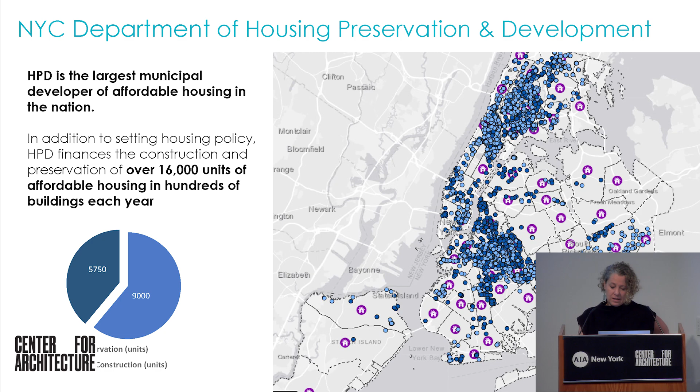Same goes for work in our preservation portfolio, right? Everything from solar, to deep energy retrofits, and finally even one passive house retrofit project that we've done to date. So this is important. It's really important to our mission of producing high quality housing across the 5 boroughs.

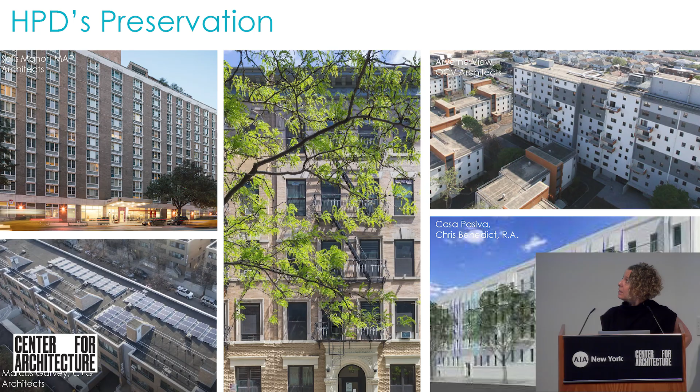We've been doing a lot of things since the Enterprise Green and LEED requirement rolled in — just a few that I won't focus on today, but for background, we launched our Solar Where Feasible program in 2020, which requires solar on all projects we finance where it makes financial sense. In 2022, we launched our $24 million joint retrofit electrification pilot with NYSERDA, and we're trying to electrify really challenging preservation buildings in our HPD pipeline.

What's interesting from a resiliency standpoint is we're focusing not just on buildings on oil, but buildings in flood zones where there's repeated flooding of equipment — that's the resiliency tie-in there. In 2023, we launched our Future Housing Initiative to fund all-electric passive house projects in our new construction pipeline. There might be some folks in that program here today, but I won't go into that. And in 2024, stay tuned — Earth Day's coming, and we always have something fun and new to announce at that point.

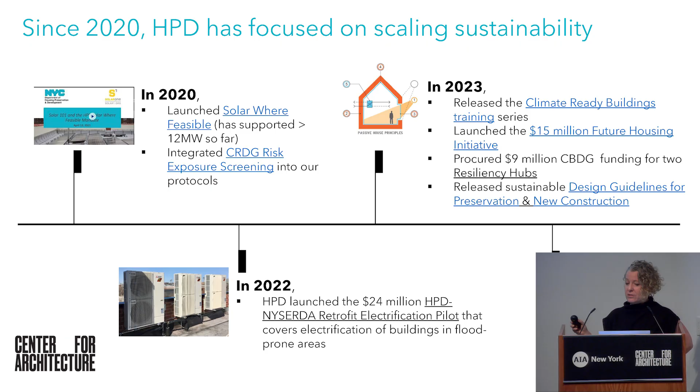None of the work we do would be here if the city didn't have an ambitious climate agenda to begin with. It's really hard for us — we love to be ahead of the game city-wise, but we do need a baseline agenda to make our work successful and to get buy-in. I think everybody is pretty familiar with all of the PlaNYCs that have happened since the Bloomberg era.

Everything from a 30% greenhouse gas reduction in the original PlaNYC, to One City Built to Last, which embedded the 80 by 50 criteria that de Blasio put into place, followed by the Climate Mobilization Act. And now, today's PlaNYC under the Adams administration is really about just getting all of these ambitious goals done. That's super important — we already have the end goal, and we need to focus on doing it.

But today I want to focus mostly on resiliency — that's the purpose of this panel and what we're doing. In 2018, the first Climate Resiliency Design Guidelines were released, and that's really important because everything in this manual and report set the stage for the resiliency work that city projects will have to follow, including HPD projects.

What is in the Climate Resiliency Design Guidelines? Has anyone actually read them? Show of hands — okay, well, really good resource to look at. They focus on the 3 key risks for New York City: increasing heat, increasing precipitation, and sea level rise. There are plenty of other risks we're not talking about and are starting to see, like wildfire risk a couple summers ago, high winds, and other things, but in New York City these are the 3 key risks we're focusing on.

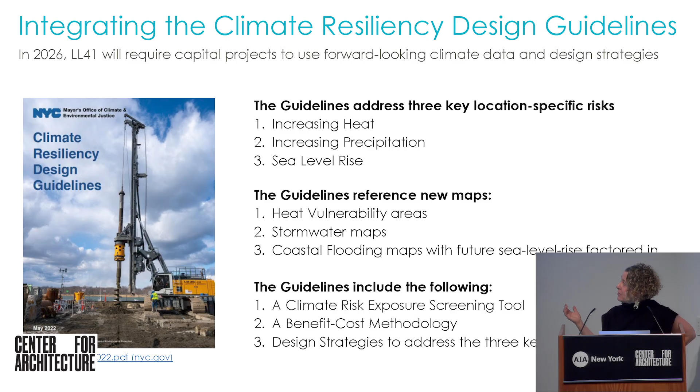The other things in the guidelines are a risk exposure screening tool, which is really important so that designers know where risk is to start with; a cost-benefit methodology; and, of course, design strategies to address risk.

Way back when — back in 2020 — we thought, okay, we've got these great resiliency design guidelines. How do we baby step into that for HPD projects?

So we started by integrating the risk exposure screening into all HPD new construction and substantial rehab projects through the Enterprise Green New York City overlay and for LEED projects. So now all buildings coming through our pipeline have to at least understand the risks they were facing geographically. And then we put some optional criteria in to say, if you are subject to this risk, we want to see you try and achieve these design goals.

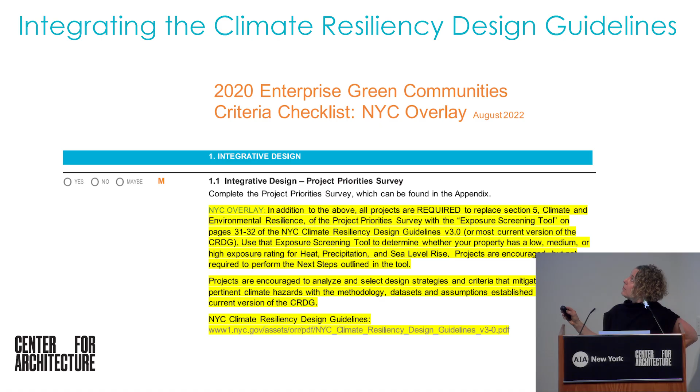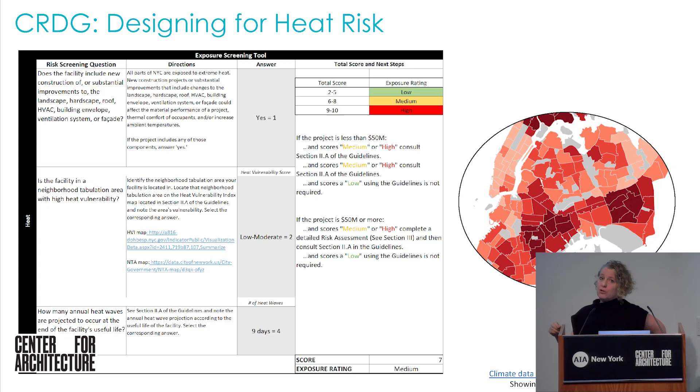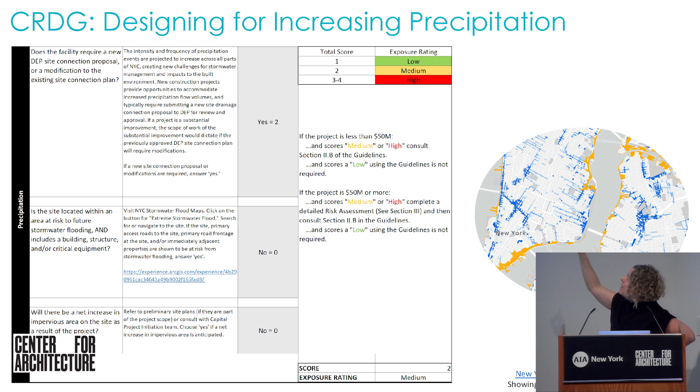A little bit more about the exposure screening and the specific risks we're talking about. Designing for heat risk references the heat vulnerability map in New York City, an aggregated map of income levels, ground cover, and so on, to show which parts of the city have increased risk for heat. For precipitation, the city finally was able to produce stormwater maps—this is really talking about inland stormwater, not coastal, but stormwater from rainy day events and extreme precipitation. I live near Gowanus, we see this all the time. Granted, there's a canal there, but we all know what we're talking about, and now we can identify parts of the city where there's flooding we have to be aware of.

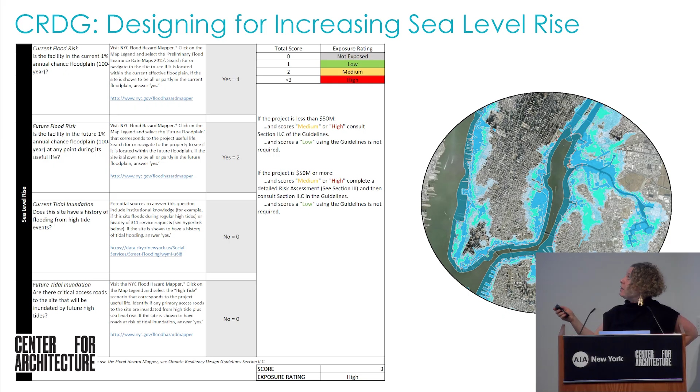And finally, sea level rise. This is obviously more in the forefront. Appendix G already talks about risk, but the FEMA maps are not sufficient to cover future risk. So these new maps—and by the way, we can share the presentation, there's links to all the maps in the presentation in HPD design guidelines—show what tidal inundation and sea level rise will look like, coastal flooding, through 2100 under different periods. So that's really important to predict what risk a site will face.

Anyway, the risk exposure was not enough, and in 2022, we committed to fast-tracking decarbonization and resiliency for affordable housing. That was part of our housing blueprint and our citywide commitment. We said we're going to go further in addressing these risks and in decarbonizing our buildings, and we were going to do that by incubating, piloting, and releasing sustainable design guidelines that focus on both decarbonization and resiliency.

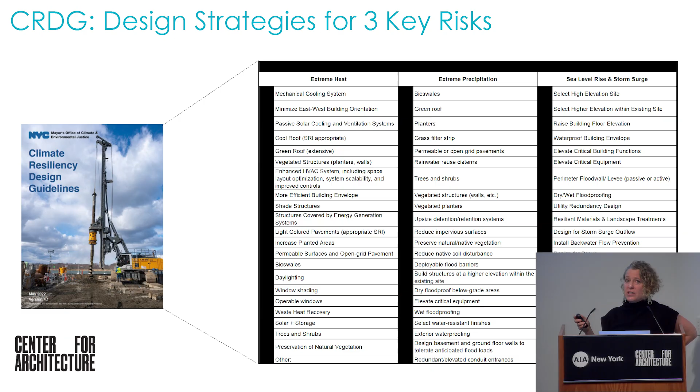We were lucky because the CRDG already gave us strategies to design for these three risks. I'm not going to go through the slide—you all probably know most of these design strategies. But we were able to leverage these and integrate them into our design guidelines in a prescriptive way, with both mandatory and reach criteria that buildings could achieve if they were subject to any of the risks.

So these are our recently released design guidelines. For the first time ever, we have design guidelines for existing buildings, and that's brand new for HPD. We have different stepping-up design guidelines for moderate rehabs, sub and gut rehabs, and new construction, and the criteria steps up accordingly: strategic electrification and strategic resiliency for rehabs, and full-on electrification and climate resilient design for new construction.

The goals here are really good buildings. We want buildings that are addressing the climate risks they face—for sea level rise, heat, stormwater flooding, and so on. But we can't just do that; there's a lot of co-benefits to tying that with decarbonization. This is kind of a little hacked up cartoon of integrating heat pumps into our buildings, but we all know these two things work really well together to make good buildings, and that's what our guidelines are about.

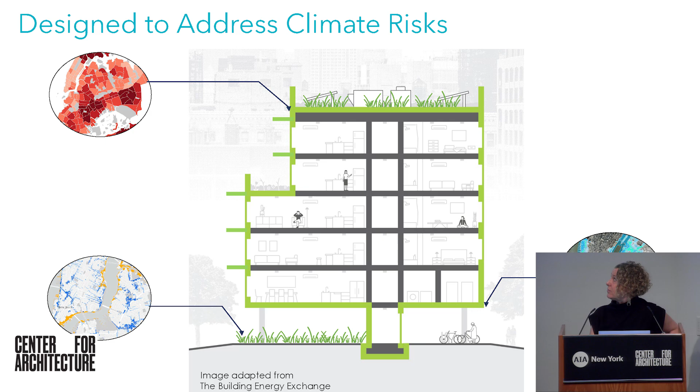Specifically, here are some of the criteria in our different guidelines, and this is just a non-exhaustive list. We encourage everybody to take a look at our guidelines because we think they're well ahead of what the code requires. They're ahead of LEED, and we're trying to be the leading edge of sustainable and resilient design.

Like I said before, the rehab requirements are strategic electrification, focusing on oil buildings, buildings in flood zones, and we want to see new equipment protected—we don't want to invest in equipment that is subject to flood risk. We think that's really important, and we want to electrify the worst performing buildings first. There's also some less sexy measures in here, like backflow valves and tenant notification and awareness for flooding. It's harder to integrate resiliency into rehabs, but we're doing what we can as our first set of mandatory criteria.

We also want to address heat risk by requiring cooling for seniors, making sure there are outlets for AC units on all of our buildings. And anywhere there's new finishes, new paving, new surfaces, we want them to be resilient if they're facing any kind of flood risk. So that is our starting point in our first ever design guidelines for rehabs.

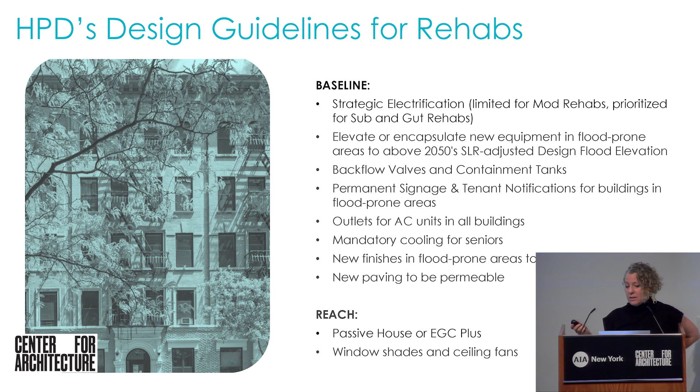We do have some REACH criteria, some of which are big, like passive house, some of which are small, like ceiling fans. For new construction, bigger goals, it's much easier to go further on new buildings. Before pencil goes to paper, read our guidelines, understand what we're expecting of you, and then all of our buildings will be designed to be as resilient and future-forward as they can.

So full electrification, all residential uses and critical equipment are either above grade for inland stormwater flooding or above the 2080s sea level rise adjusted design flood elevations. We don't want to see anything put in at-risk areas when we know where the risks are.

A couple other things like place of refuge and backup power for seniors. We want to target our most vulnerable populations with our guidelines. And some other things, shaded open space for senior and low mobility populations. Where do you go if it's really hot? Maybe up on the roof.

And then some other less sexy criteria. Now, these are all really hard to achieve. It's not that easy to do the perfect building. For that reason, we integrated design waivers. When we said we're going to set a really ambitious agenda, we said we've got to leave a backstop or some relief where some of these criteria are not feasible.

So we handled that through a design waiver process. If a project comes to us, we want to know early what's not achievable. And not only do we want to know what's not achievable, but we want to know why. Is it a technical reason, a financial reason? Is it a zoning issue?

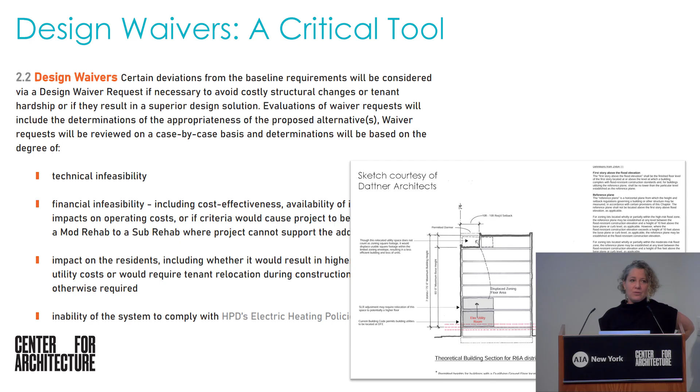And thanks to Dattner for helping us sketch out what we might need as a design waiver requirement. Like I said, it's all about collecting good information.

So a couple other things outside our design guidelines that we're doing at HPD. The CRDG through the Mayor's Office of MOCEJ, whatever, I'm not going to go through the acronym, so I always forget what it stands for.

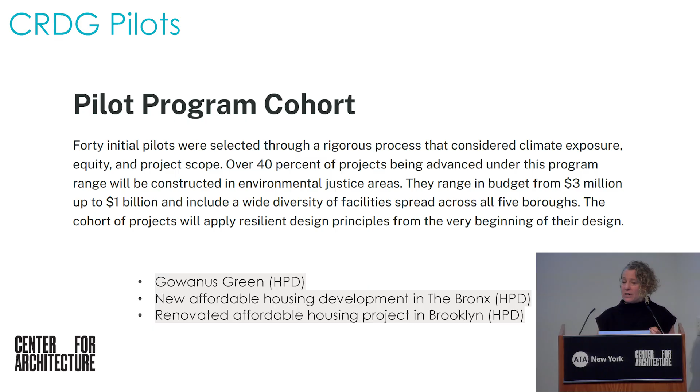They're piloting projects for the climate resiliency design guidelines. The guidelines will be mandatory starting in 2026 for city buildings. So through this process, the Mayor's Office is refining the requirements. There's 3 retrofit and new construction pilot projects in HPD's cohort, and that's how they're figuring out how to refine the actual rules. Now we're trying to get ahead of it with our guidelines, and hopefully that will also be informative.

Recently, we got 9 million dollars in grant funding to integrate 2 community resiliency hubs in our senior housing projects. It's free money. We want to see what we can do with that.

So there's 2 projects that got funding, and they can serve both the residents and the community by integrating a community space that has backup heating, power, cooling, outdoor space, and that way, in the event of an emergency, there's a local place for the community to go and be served and helped.

We do a climate-ready buildings training. Our projects are required to go through certain trainings as part of our program. This trains, I think a lot of people in the room already know this, but how to do a good building that is both resilient and sustainable, and how to integrate them and why. So there's case studies, and it really talks about how you can make the good, best building that we want to see for our projects.

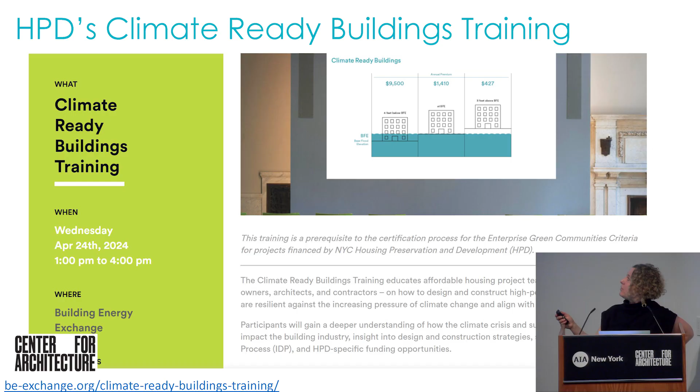Flood Help New York, it's an interagency effort to bring resources about flood to building owners and renters, and we engage in that. And finally, we have our RFP process, where projects on public sites are competitively procured through an RFP process.

And we're trying to integrate innovation, high performance into all of our RFPs. This is where we see the leading edge of good design. These projects come through, they're exemplary, they're like the lighthouse of where we want to be going with our projects.

So a couple recent ones, and some people might remember Sendero Verde, which was our first passive house RFP, which really led the way for passive house to scale up in New York City. And we want to see that happen with innovation and resiliency as well.

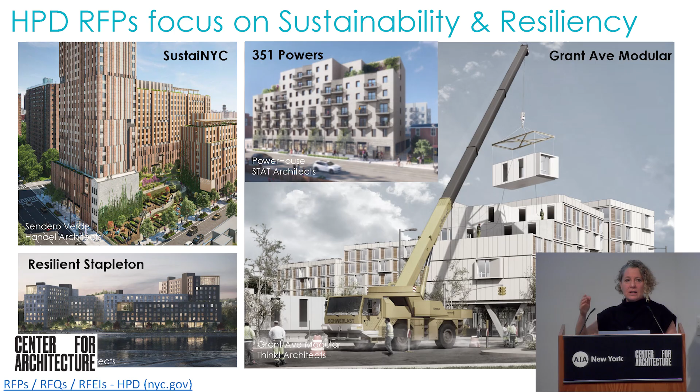Last thing I'll say is we could do none of this without ongoing collaboration. Nothing we do is not totally interwoven with the people we work with. Our sister agencies, right—our design guidelines come from the requirements and best practices from DSNY, Mayor's Office, Department of Health. Everything gets integrated into one place. We work with our sister housing agencies to make sure we're trying to do the same thing and align all of our requirements. NYSERDA funds pretty much everything my team is doing. And finally, folks like you guys—we absolutely can't do any of this work if the leading edge architects aren't doing it first and letting us know what's possible. That's where the innovation comes in, that's where we engage to make sure we're following the leaders and bringing everybody else along. And with that, I'll pass it on to Ilya.

Wow, that was great, Jennifer, that's amazing. And it's really great to be in a city that is very forward-thinking in the agencies. Seriously—working in a lot of places around the world puts me in a position that I can make that evaluation, and New York City does have some incredible agencies and collaborative efforts to lead on climate action. So I'm not going to belabor who I am, because Grayson did a really nice job of putting way too much information out there. But it's great to be here today.

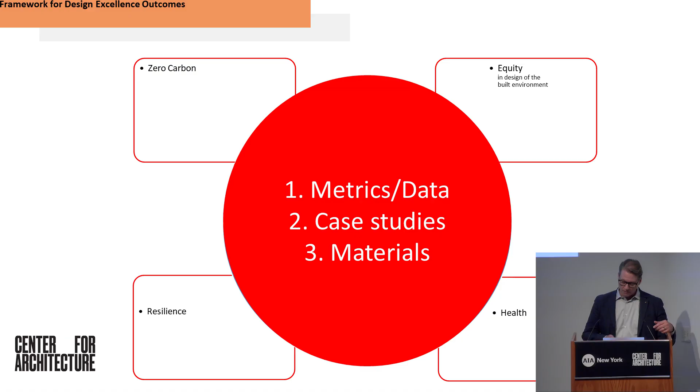In addition to the Framework for Design Excellence, the Resilience Design Toolkit is now available from AIA. It gives you two avenues: one, how do I bring this into my office as part of project development, and two, how do I use this as a way of creating projects. It's a great document, so I suggest you download that.

And the last one there is the Disaster Assistance Handbook that's out there—the pre-disaster version, which is an advocacy tool for local governments. But ultimately, this is two sides of the same coin: resilience and sustainability.

So this is a great kind of roadmap that says, here are the sustainable development goals globally, and here's what architects can do to meet each of these. The great thing is cities and state entities have committed to sustainable development goals—New York State has done it. The sustainable development goals for the city are embedded in the documents that are out there. The stuff that Jennifer is showing really hits these.

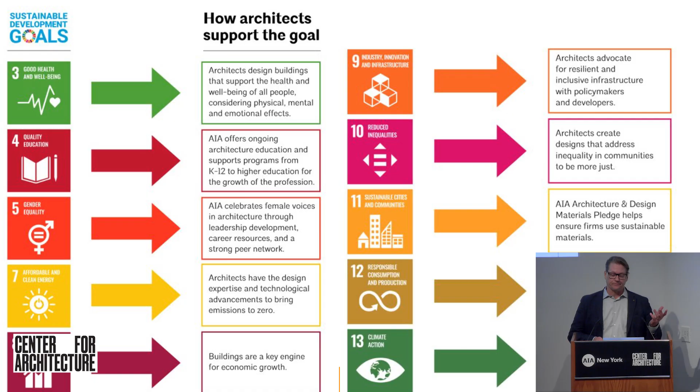So we've been mapping those at AIA National to understand our Framework for Design Excellence. If we're going to say resilience, sustainability, equity, and health are all together, how do they work together? The global frameworks are now working together. The last two, COP 27 and 28, the thrust of the work there is how does financing meet all of these agenda goals?

But of course, us as architects, this has to be part of our project work going forward. So now I'm going to take that hat off. I'm like, oh gosh, now I'm just going to talk as a firm leader, an architect, being in the room with architects. This is great—it's great to be at the Center for Architecture.

And I was asked to give you a presentation on one of our projects. So I'm going to take you over to the island of Oahu. This is one of our projects that we've been working on for a long time—these are long lead projects. And I was asked, Jennifer asked, how do I decode the process? I think that was an extraordinary pre-meeting because it completely changed the way I wanted to present this project.

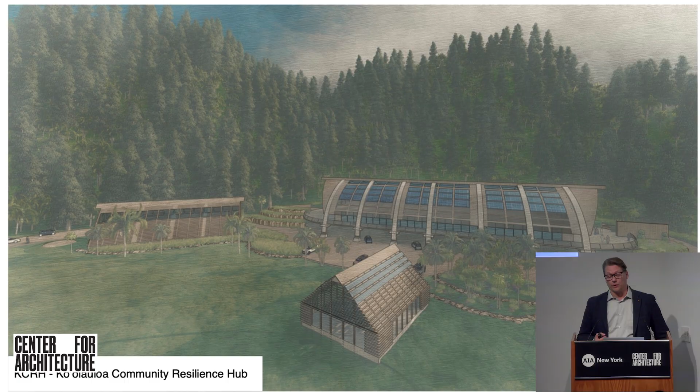Usually we're presenting it in a completely different way, but I think this is really great. Most of these projects start with community, understanding what the vulnerabilities are, right? And this is no different. This is the project I will be discussing today: an entire campus of 5 acres on the North Shore of Oahu that has a great deal of vulnerabilities. Our process starts in this kind of way.

We always go through this: we assess the hazards of today and tomorrow. We always project forward because you're building for tomorrow. Analyze the site in a very profound way. Plan with the community and align with government and funding programs.

And then you design the site and buildings, and hopefully at that time you get to build the project. But there's a lot of pitfalls, as you know.

It sounds like these are processes you already do, but I want to walk through them, because when building in frontline communities, like we saw from Jennifer's project, when you do an assessment there's already work that's been done for you. We always align with the local hazard mitigation plan, taking the all-hazard assessment and applying it to the site. Some hazards may not be prevalent to your site, but you must address all of them because all the funding you're going after has to align with that government framework.

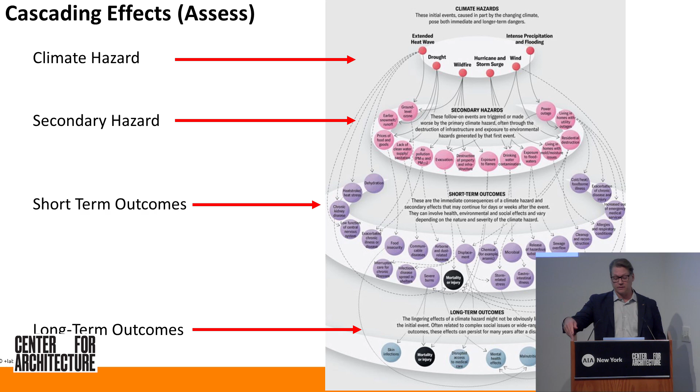Once we have all of that, we take it to the next level: what's not in the government documents are the cascading effects. So we look at the climate hazard, then the secondary hazards that come along with it, the short-term and long-term outcomes. That's where we dig into how this is relevant to the community and what the vulnerabilities are, what the missing link is, and what the weakest part is to create a resilient, sustainable outcome for this project.

We take that framework and align it with the FEMA 7 community lifelines. All federal funding is aligned with this, and all the government speak around safety and security, food, water, shelter, health and medical, energy, communications, transportation, and hazardous materials. We map all of these for every project.

We have to, because FEMA announced about a month ago that they'll be breaking water out as its own lifeline, since it's so critical around the world—too much water, too little water, wastewater, potable water. Everything to do with water will now be its own, an 8th community lifeline.

What that means is it really shows us the way forward. Working with indigenous communities—these are 7 Native Hawaiian villages we're working with—we look at the 7-generation rule. The 7 generations is about respect for the culture, character, beauty, and history of our state island communities, and we look at how our building, project, or development must respond for that time frame. So bringing resilience and sustainability together creates equity, that's the two sides of the coin.

But one thing I want to add is ecosystem services. Especially in the Hawaiian Islands, ecosystem services unlocks both sides of this coin—you cannot do any of this work without ecosystem services. That rings true at COP 27 and 28. If you're going after funding from the World Bank, you must include ecosystem services in your proposal, otherwise they won't even look at it these days.

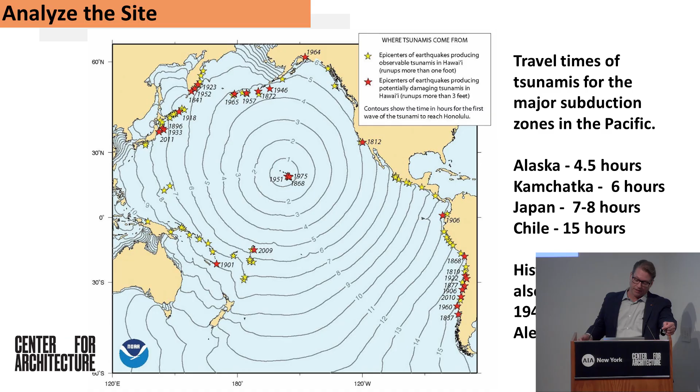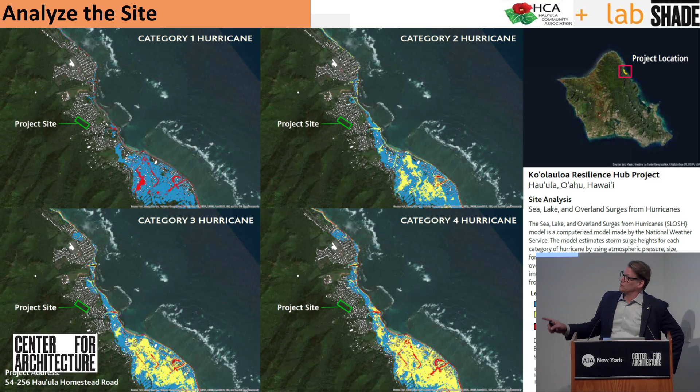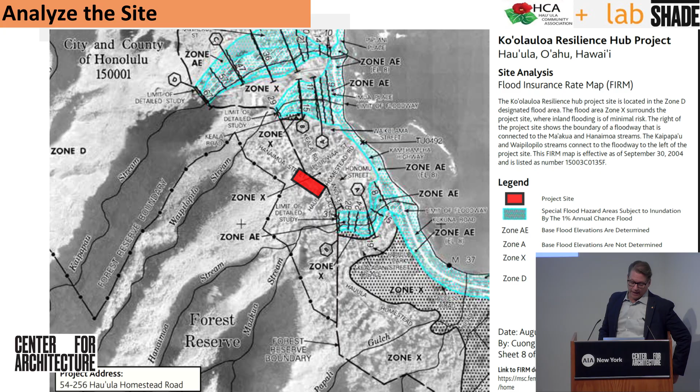There's our site, in this upper corner—the northeast corner of the island of Oahu. Here are the vulnerabilities from a Category 1 through Category 4 hurricane; this is just the water inundation. Our site is located on that 5-acre site shown here on the map. There's the site again in the center, and we're looking at the FEMA flood zone—we're up and out of the FEMA flood zones, as well as the Category 1 through 4 and Category 5 maps.

There's 26,000 people in the district. There is not a single rated hurricane shelter at all. They're completely exposed with one road in and one road out, and the road is a coastal road.

Just to give you a flavor of the site, it's completely overgrown. These are all invasive plants. We cataloged the entire site, 5 acres.

There are only 5 trees that are native. And so that's a program that I'll go into a little bit later.

So the next part is the community engagement. In this community engagement, my community is self-aware, actualized, and invisible. That was one of the first quotes that came from the community leaders. They've been trying to build resilience and sustainability in their community for generations, and they're ignored by their local government.

So we put together our planning team. When you're doing this kind of work, the community is a big deal. So we have the residents, landowners, business, institutions, government, which includes city and county, state and federal, areas of legislature and funding are part of that, and then the design development team, which is us, a group called G70 on the islands, and SHADE, the SHADE Institute. So there's a lot of us involved in this.

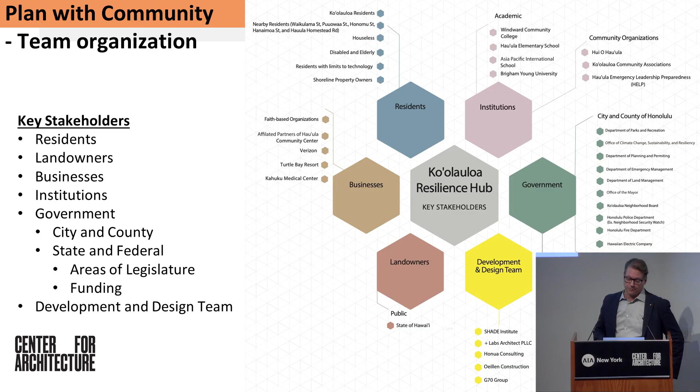I won't go through that whole slide, but you can see the complexity to bring that kind of a project together. And one thing we did discover in working with the community is cultural erosion.

Between the ages of 18 and 35, everyone leaves because there's no job opportunities, there's no vocational training, there's no higher education available on the island. Everyone leaves, but then they all come back because they miss where they grew up and they want to raise their families there. That missing middle creates a lot of issues.

One, food security is an issue. There's 80 farms that surround this community, and they can't afford the food that they produce. They can't afford to eat the food they produce. They have to use that for economy.

So we looked at that system as one of the things that we have to do. We have to bridge that gap, and somehow this site, 5 acres, has to be able to answer some of those issues. Under blue sky events, this entire community loses power 4, 5, 6 times a year.

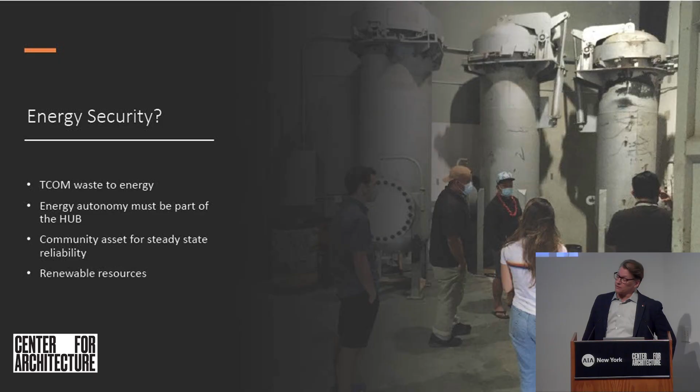So the fragility of the old and aging infrastructure is an issue. What does energy autonomy look like for this community?

85% of the housing will be damaged from a Category 1 hurricane. So we know what the load of population is. If a Category 1 comes, we have to have a system for our community resilience hub that will shelter that many people as a minimum, not including the tourists that are there at the time and all of the other folks.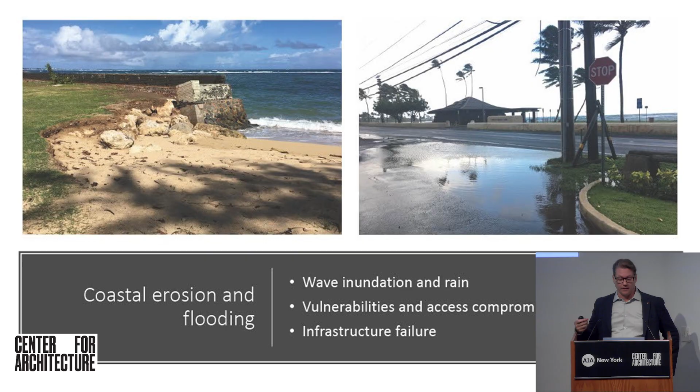The erosion wave inundation on king tides washes out the road constantly. So what you're looking at is that the infrastructure for transportation in and out doesn't work.

So back to this slide, what happens here with the HMP? When we look at this, the federal funding tied to this is IRA funding, EPA funding, Homeland Security, FEMA, and HUD funding. Once you identify all of those things and start your design process, you know how to aim the project process to the funding streams.

And we've been receiving funding in almost all of these cases, and we have applications for other pieces. So on the island, they have their hazard mitigation plan, but specifically the OLA plan.

And in the OLA plan, we found in bouncing forward that they want to do community resilience hubs. And that's great, because this community needs a community resilience hub. In fact, they identified one specifically in the town of Hauula in the literature of the government. So we're one of 7 that are proposed, and we'll be the first on the island.

And to answer all of those climate issues, this is what's happening in the design that I'll be showing you, is that we're looking at 7 generations in the future. Transportation and supply chains means that we have to build the building to be isolated for 30 days for that entire population. 30 days of autonomous energy, water, food, all of those things.

That's pretty specific. Strong winds, including hurricanes, rains, extreme tsunami zone. We're up and out of it. We know our location. We also have to look at wildfire.

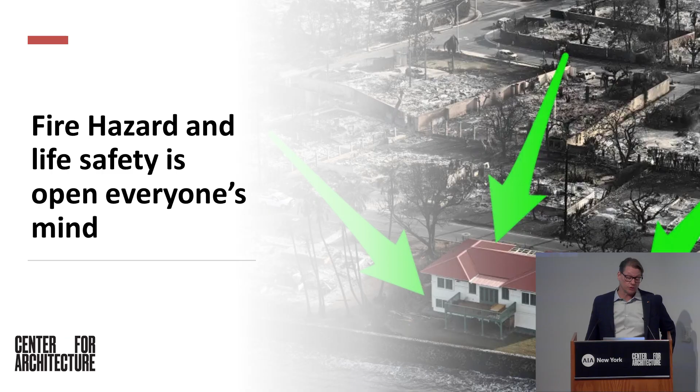Just to give you a flavor of that hazard research, in terms of fire hazard, it was on everybody's mind. We took the fire hazard mitigation planning we'd done for the project and did a recent presentation to make sure folks knew this was already part of the project process. For that, we used a hazard vulnerability assessment tool you can get online, and began to understand how this affects the project.

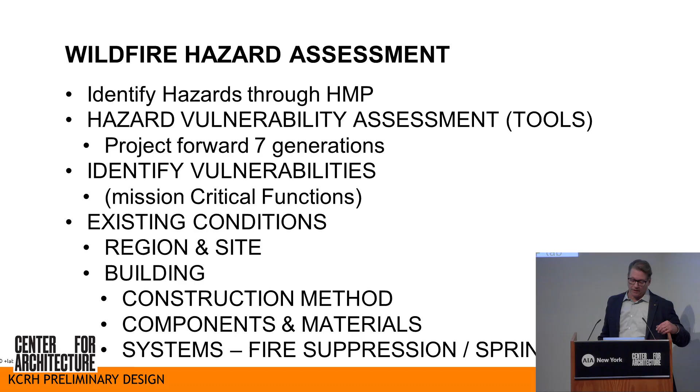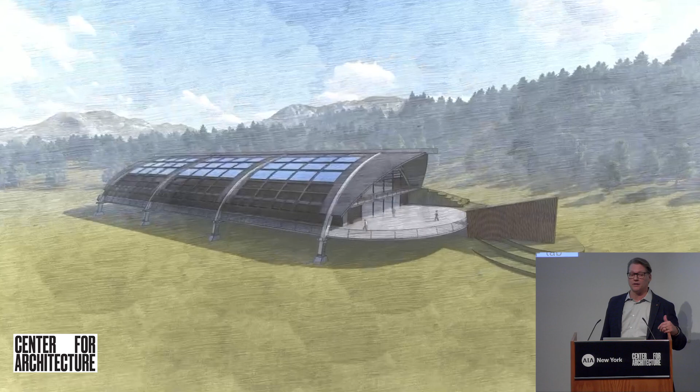Let me show you the project and how it applies to this. This is the main hub building, and this will be built to FEMA 361 standard, which is near absolute protection. It will house 1,500 people for a 30-day period with all power, water, food, everything necessary. It also doubles as the community center that's being relocated out of a flood zone.

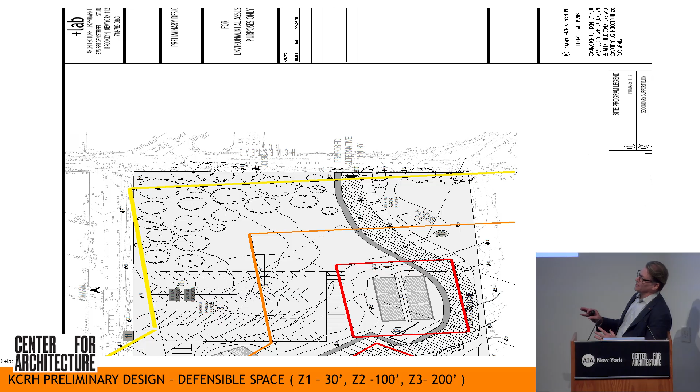So it did mess up a little bit here. What you're trying to see is the defensible zones, 30 feet, 100 feet, and 200 feet around the properties. This is the site plan, which includes a helipad, or an open field done so a helicopter can come in after disasters. All of the xeriscaping and landscaping, using natural features and green infrastructure, is part of the hazard mitigation for fire.

Now, one of the community workshops, we brought together stakeholders. This was during COVID over a 2-year period. We brought in facilitators, historians, and all sorts of people to do interviews, but also to work on this very specific site as a community, to unearth all the elements they wanted to bring forward, not just understand the vulnerabilities. Safety was observed, and we had folks from the youngest generation all the way to the elders join us.

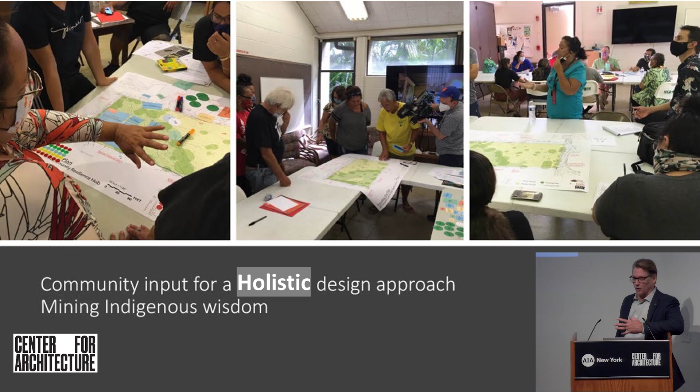We identified those priorities over 2 amazing workshops. Every government official joined us, along with community folks, over 100 participants plus online teams. We did these workshops with all the stakeholders identifying the priorities of the community. This holistic design approach really mined out the indigenous wisdom from folks who had been there and could go back generations upon generations to understand how things have changed.

Here are a few of the faces of the community. One of the things you can see on the left, that's Dottie, one of the main community leaders who runs the current community center.

The community has not had a voice. We've not been visible. Community engagement, getting together, talking, sharing, laughing, hurting together, whatever it is, builds bonds in the communities. They don't have a place to do that holistically.

And the future of the community - when we talk about sustainability, we sustain our life, and I believe it's helping sustain our culture. So there's a desire, even in the youngest generation, to stop the erosion of culture in their community and give them opportunities.

From these lovely ladies, the wisdom of the community: what is really important is our ability to be effective and engage the local people within the cultural context of livelihood. So you're getting a theme - everyone we interviewed talked about the erosion of culture and the value of culture. The relationship to land and water are extraordinary.

And lastly, one of the last quotes I'll show you is: we may be poor, but we're rich in our culture. That's why we still hang on, that's why we still do what we do. We fight for the next generation so they don't forget the culture, so they don't forget where they're from and their roots.

Taking from that, some of the community queries that came out are reconnecting to the culture and cultural knowledge through art, through storytelling or talk story, which is what they do. One thing that came up is they want to create a Pono Center - really re-envisioning the relationship of people to culture, to place, to the land, to the air. So we had all of this before we even put pencil to paper.

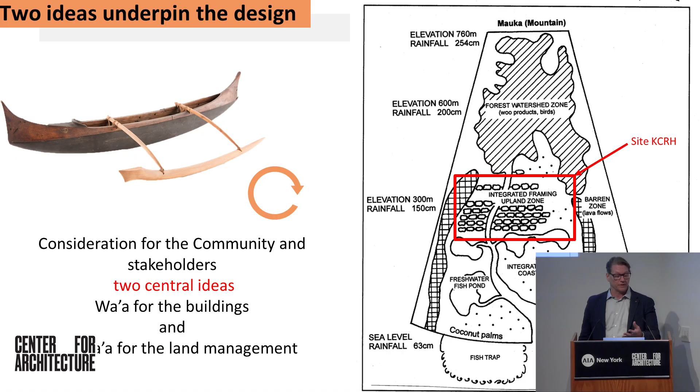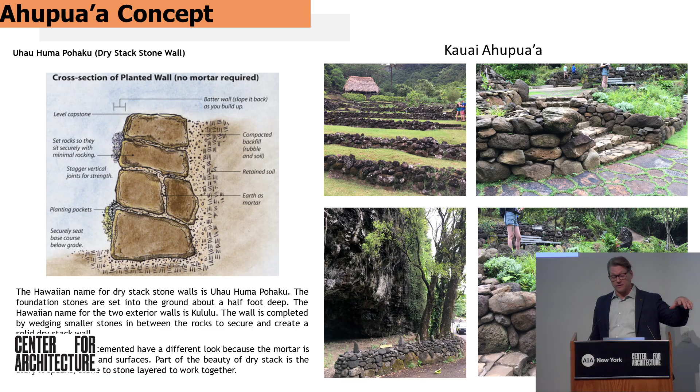The archaeologists had found some of the dry stack stone walls that were there, and so we had to understand what the use of them were, how they're used for water management, growing of food, and used as an ecosystem service that benefits the community as well as the site itself. There's me with a lot of folks from G70, our engineers out there.

We are volunteering to understand how these systems work fundamentally so we can design them into this project. I did this for several weekends and brought some of my team over from our Los Angeles office. Very beneficial, because remember the invasive species I showed you? Hawaii has a program to get rid of invasive species and replant with native species, and we can define the native species as food producing species, since one of the vulnerabilities is food insecurity. People have forgotten how to grow their own food. So this is a regenerative process, really going beyond sustainability, which is something we strive for in the office, but this project is begging for that to happen because it must happen for the community. Not just for food production and plants, but also for the cultural aspect.

So there's a lot more to that, but then I'll take you on to the Wa'a. In speaking with Dr. Tusi, one of the elders there, he talked about the Polynesian mariners. Anytime a storm would hit you at sea, they would purposely flounder their boat, because when the boat is floundered it holds its place in the water as the storm goes over, and then you can still navigate by the stars.

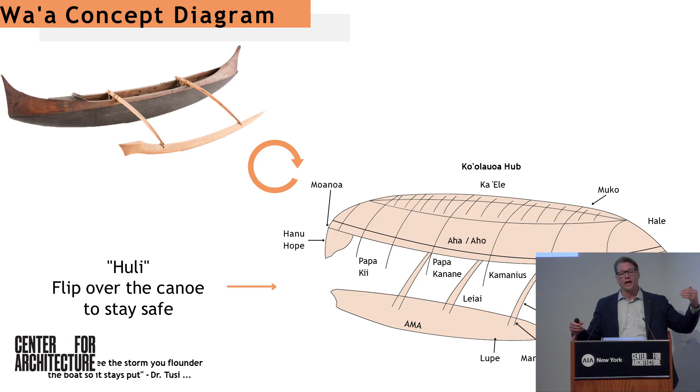After that story, we started to do a lot of research. What happens when they come to an island they've never been to? The fact is, if a storm hits the island, they don't know where to shelter, so they flip over their canoe, they call it huli wa'a, and take shelter underneath. The project process began to take a look at that, and you can see the genesis of it. Once we presented this to the community, they were aghast. They said no one's really taken our culture and brought it into a contemporary context of architecture. No one. This is all from the work with them, and they helped drive this design.

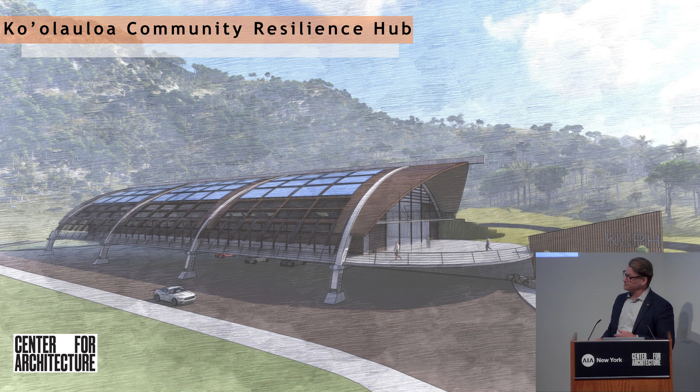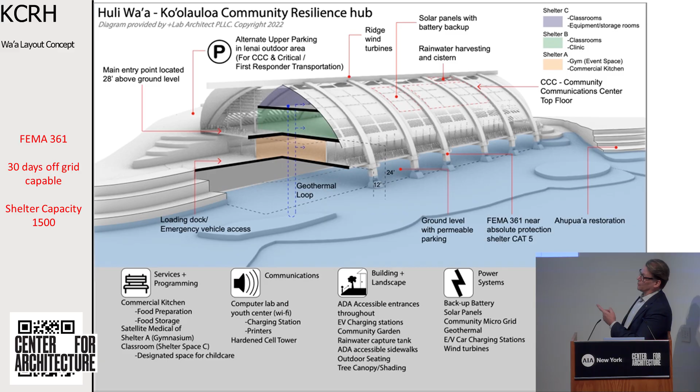This project is a FEMA 361 near absolute protection shelter for 1,500 people, 30 days off grid. It is up and out of the extreme tsunami zone, with all of these very stringent elements. It's clad with solar panels, rainwater harvesting. The ridge has wind turbines as part of the makeup, and it uses geothermal as part of the loop, or at least that's the proposal.

In terms of the section, you can understand it better - there's parking up above as well as underneath, and there are three areas for shelter. One is a food services area where local farmers can come in and process their food to create local economy rather than selling it to a middle person, increasing the value of what they're doing, something they've never had a place to do. A gymnasium, which does not exist in three communities - there's no place for kids to play indoors. Then there's on-site medical and classrooms for vocational training. We have Windward Community College as one of the partners, doing vocational training so kids at 18 don't leave. And then there's a Pono Center, which teaches cultural education from K through 12 - language, art, everything - all part of it.

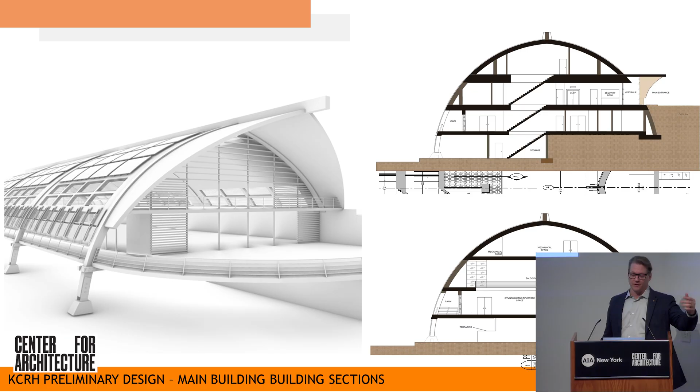One of our great team additions is Tuoni. He is considered the master carver of all the Polynesian cultures, as an elder. I got to meet with him, and he's committed to opening a carving school as part of the site as well. They're going to be carving the entryway as well as the interior of the main spaces, to carve the lineage of all the local families as part of the interior. So think about it - when you're sheltering from a storm, you're surrounded by your family, the spirits of your family. That is a very cultural piece.

So that's all fine and good, but onto the sustainability side. We have an ETIPP grant with Sandia Labs and Department of Energy, and we've taken this design and worked with them to understand how this becomes beyond net zero, with 30 days off grid. They considered everything from solar, wind, hydrogen, geothermal, hydro wave energy, all of those things in our design process.

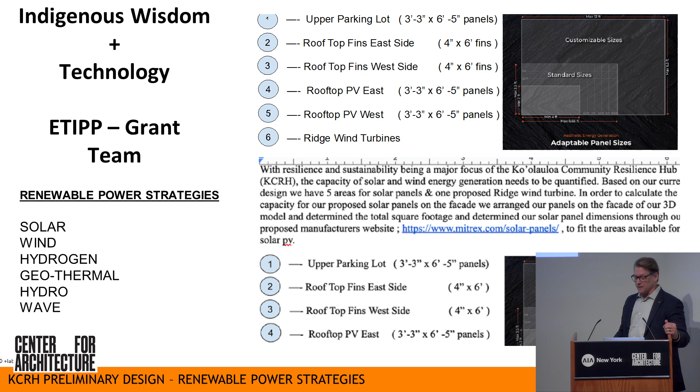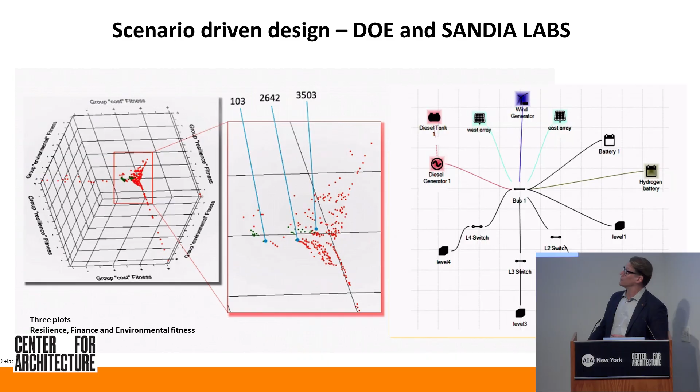What our mapping looks like is, and this is just a snapshot, but there are 3 scenarios that have come forward, and these are choices the community has to make, plotting the shocks and stresses, the ecological fitness, and the cost to the budget. We've had 2 years of work with these folks, and those scenarios tell us that resilience, finance, and environmental fitness have given us the answer of how to move forward with the energy side.

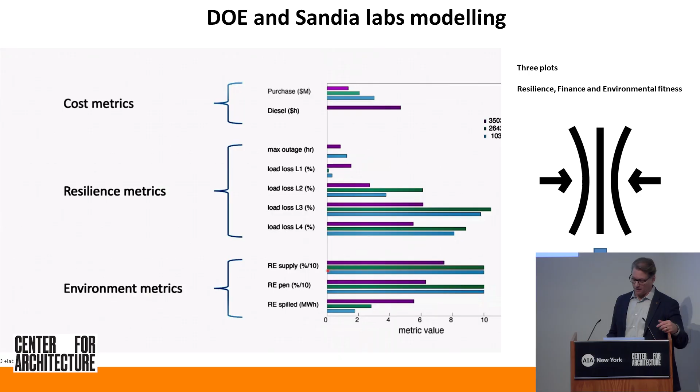We also have a FEMA technical assistance grant that I didn't include in the slides. Similar to the sustainability and energy production side, we have the resilience side for everything you can possibly imagine, from the medical and life safety and protection. So again, that's the last view of this.

In terms of the cultural wisdom, they still have on the books that you can build traditionally in the islands. So when Tuoni, the carver, is making a proposal, one of the buildings there is going to be community built in a very traditional manner. It's called a haleba'a. We took a look at how these actually work and how they've been adapted on the island. There's the Bishop Museum haleba'a, so there's a more contemporary context for it, and how they've used some of the things in Kauai where they've restored some of these land management issues.

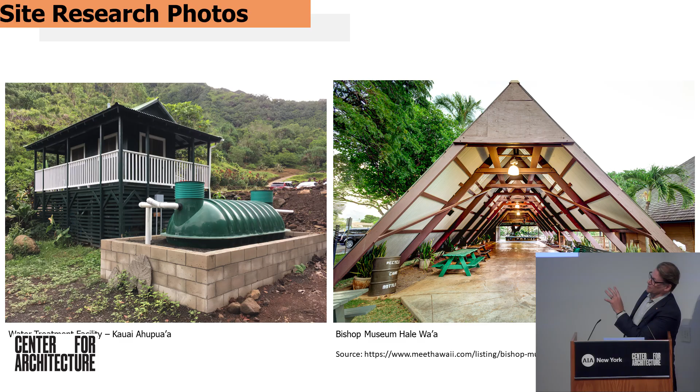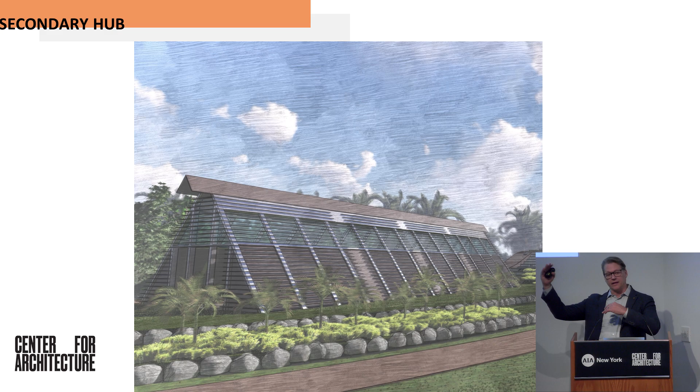And the tertiary building there is called the secondary hub. This is where Windward Community College will have all their classrooms. You can see that there is a resonance with that. This will not meet ICC 500, so it won't be resilient to that highest standard, but it will hit Category 3 hurricane fitness, and it's up and out of the tsunami zone as well.

So this is where we're at now. This is an OLI, a blessing for the site. The site was granted back to the community for the next 99 years. They started by asking the spirits of the site, all the ancestors, if we could start work there. So the OLI was our start.

Then clearing the site was funded by some of those agency asks, and we hired a lot of locals to do the first part of the clearing of the site. Then we reached out to a lot of contacts, since I do a lot of disaster work. Team Rubicon, these are all retired military - they go and help out after disasters, but they also will go and clear sites for you. So they cleared the rest of the site recently, and now here's what the site looks like.

We preserved the 5 existing trees, and that's state law, the native species, but you can see how much the invasive species are across the island, right? So thank you to the gray shirts - that's what they're called. Our next step is planting 100 native trees.

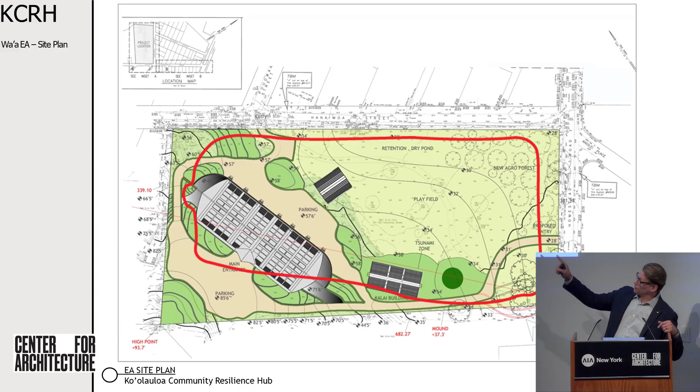Since the site's already been cleared, the EA process is now complete, and that has moved forward. Public comment is finished. We established that red line as a walking path that the community uses now to go around the site. They've had a lot of events there. In fact, from the top of the site, every Saturday they have a community farmers market, and they have hay rack rides for the kids, things like that go on all the time.

But there's the community, very, very happy. And my birthday was a couple weeks ago, so just bear with me.

This is great news, because if you look down, all the way down at the bottom, Hui o Haula, this town of Hauula - this is our project. The Senate earmarked our project for $5.4 million. That is our Kickstarter for horizontal construction. So all of the horizontal features, everything from the helipad, all of those things, and the water management, is being paid for from that pot of money.

The local government has dedicated 3 years of funding to build the rest of the project, and then we're going after a FEMA BRIC grant for the community safe room side, which should pay for about 75% of the main building through the technical assistance grant. So that's how we decode the process.

Does it go fast? No. We're at almost 5 years now. This will be done in another 3. So if you're doing this work, it takes a long time, but man, it's a lot of fun. It's great. And the last thing I'll leave you with.

This is the first song produced in 30 years in the town of Haula, about Haula. And it started the cultural regeneration because they were so happy about this process going forward, they started to write songs for the very first time in a long time.

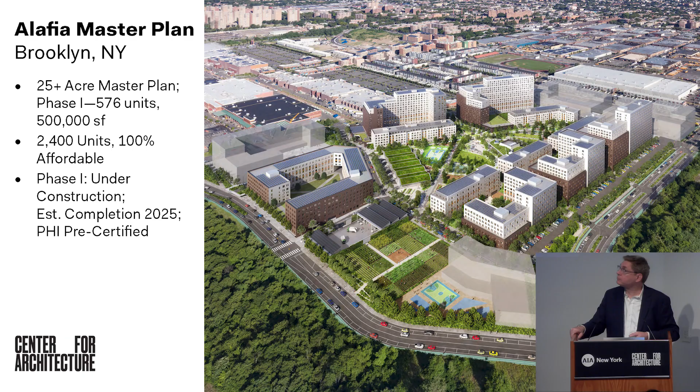It's currently under construction. This obviously will not be built all in one go, but there is a master plan and a general project plan, which is filed with the state of New York, which is the state version of the ULURP that many of you are familiar with here in New York City. The first phase will be finished, fingers crossed, at the end of this year. The project is part of the Vital Brooklyn Initiative.

I'm sure everybody in the room is familiar with it. If in case somebody is not, this is a holistic approach to housing, which doesn't just see housing as shelter, but sees it also as a source of community stability, personal health, community health, and so on, and of course economic health as well in terms of job creation. There were several sites as part of the Vital Brooklyn initiative. We've done a couple of the projects, and this project, Alafia, on site A, which is the largest site, accounts for about half the number of units in the Vital Brooklyn program.

So where you live matters. In terms of sustainability and resiliency, geography is in large part destiny. That being said, however, the communities that line the southern bays of New York - the Upper Bay, the Lower Bay, Jamaica Bay - cover the gamut in terms of demographics, income, and built environment. But if you wanted to take one neighborhood where the intersection of great social need and great environmental vulnerability intersect, it would be East New York, the Canarsie area of New York City, which is on Jamaica Bay in the area of South Brooklyn. It is in almost one of the most severe hurricane evacuation zones, which we can take as a proxy for flooding risk as well.

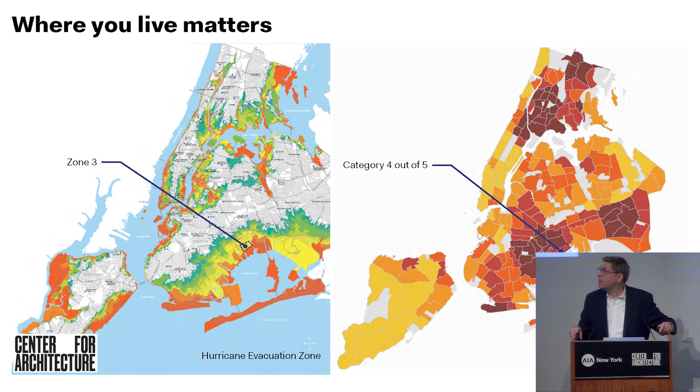And you can see in terms of the heat vulnerability index, it is very, very, very high up there. And we take that also as a proxy for personal health.

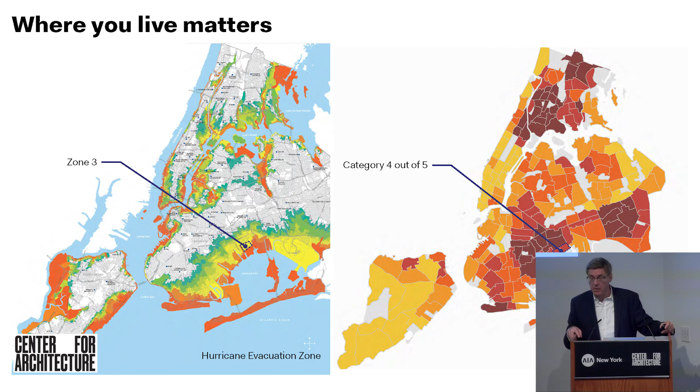Our client was a development partnership between L&M Development, which is one of the large affordable housing developers here in the city, as well as Apex Building Group, which is an MBE firm, also a developer in the affordable housing arena.

And although we had many, many consultants on this project, I would like to call attention to Scape, who are landscape architects. It was a unique opportunity for us to have this degree of collaboration with a landscape architect in pursuit of our sustainability goals. Scape in particular is very much focused on environmental resiliency over large systems.

A project of this size and complexity is not something you just build and walk away from. So the ongoing management of the development is in the hands of these two organizations, RiseBoro and Services for the Underserved. The population for this complex is 100% affordable and at very low levels of income, and will also have an important population of people with mental and psychological disabilities, many of them formerly homeless, who will be living here. So a high degree of social services, job training, healthcare, job creation, things of that nature.

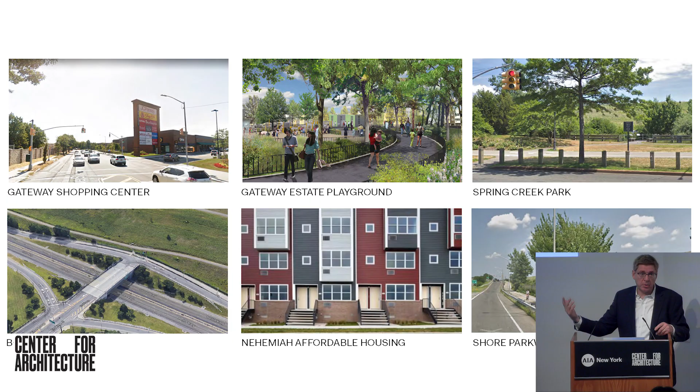There are also, as part of the Jamaica Bay restoration, a new state park out there, just across the street from our development. So...

The conceptual genesis of the project, and I'm going to describe it quickly in order to get to some of the sustainability aspects. The development team saw this tying in with the Vital Brooklyn concept of personal and community health and housing all wrapped into one, this idea of blue zones being these areas in the world where people live a long time to a ripe old age, and typically they're characterized by very high levels of social cohesion and what we would call in America life-work balance.

They, of course, don't call it that. We saw it a little bit differently. We saw this in urbanistic terms as a 15-minute neighborhood. And for those of you who don't know, a 15-minute neighborhood basically means a neighborhood where you have all of your daily amenities in terms of shopping, transportation, and services within a very tight walking radius of approximately 15 minutes, either walking or by public transportation.

So we encompass the Gateway Mall and several other neighborhood landmarks within the area, and we set out not simply to design a series of buildings, but really a true neighborhood.

So we built this idea of neighborhood identity around three scales, going from the smallest one, which is personal identity. How do you find yourself in this very large project? Here's my front door, here's my window, here's my building. It's different from all the other ones. I can identify immediately where I fit in the project.

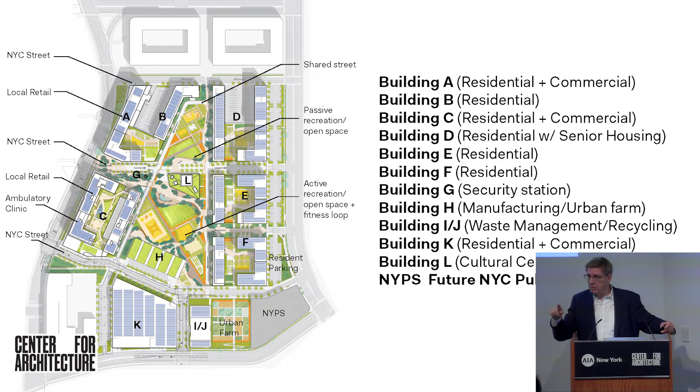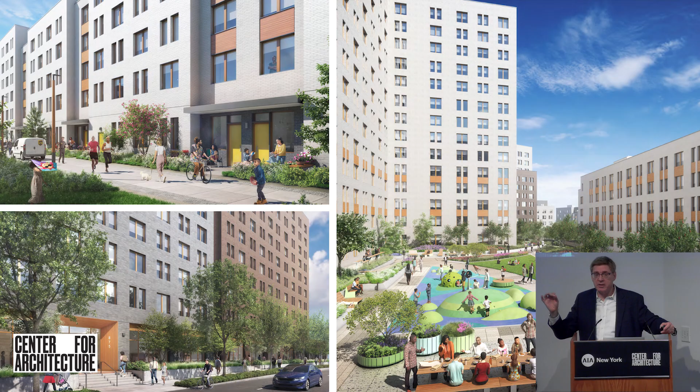And here are some of the typical spaces. So we have front doors, which are shared accesses and addresses and points of orientation on the street for the buildings, as well as individual entrances to garden apartments at the ground level. It's meant to animate the ground level and increase the amount of traffic and entrances and exits that you see.

And then within the individual buildings, these shared courtyards for the residents. This one happens not to be at grade, it's one story up. There's a certain amount of parking that we had to accommodate on the site. So this building, which is actually Building C, part of the first phase currently under construction, has parking below it.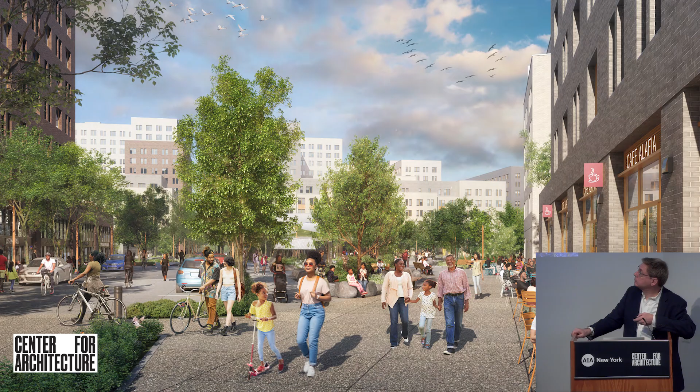And here we see the beginning of one of those New York City public streets that crosses through the site. These streets are, in a sense, typical New York City DOT-built public streets, but they're also part of a bigger DOT pilot program that has to do with site resiliency. This will have local commerce, cafes, and residential buildings all around.

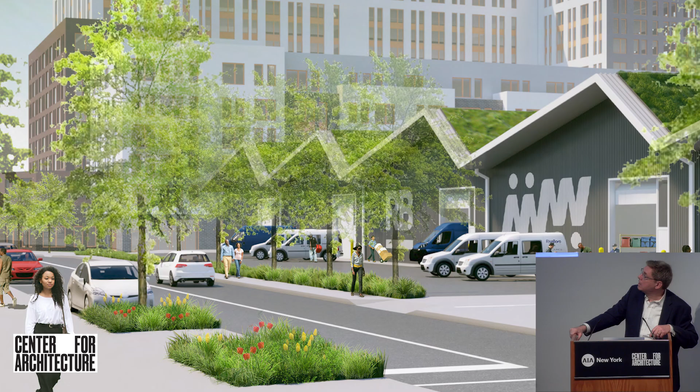Here's a shot of the manufacturing building. So the partner business in this case is going to be Meals on Wheels, which prepares meals and distributes them to homebound people, seniors, sick people throughout the city. So they will be preparing the meals, preparing the kits here. The trucks will come pick it up. Some of that food will come from the urban farms.

That is the plan. The cultural building in the middle of the site—you can see both the manufacturing building and this building have green roofs. So maximizing the amount of pervious surface was one of the goals of the project, as well as for these buildings.

Which are in the middle and lowest buildings of the site. All the residential buildings look down on them, so the roof is the fifth facade, and it becomes part of this larger interior park around which the residential buildings are constructed.

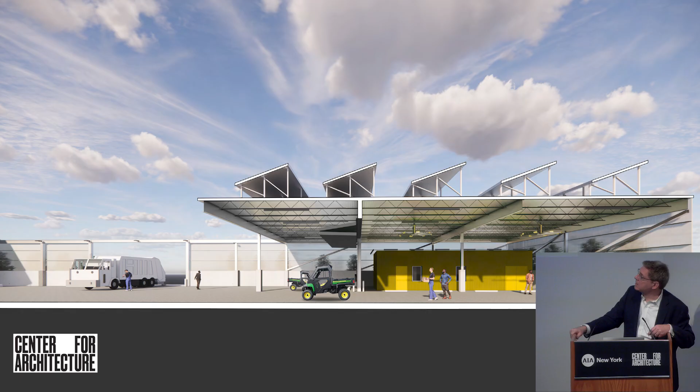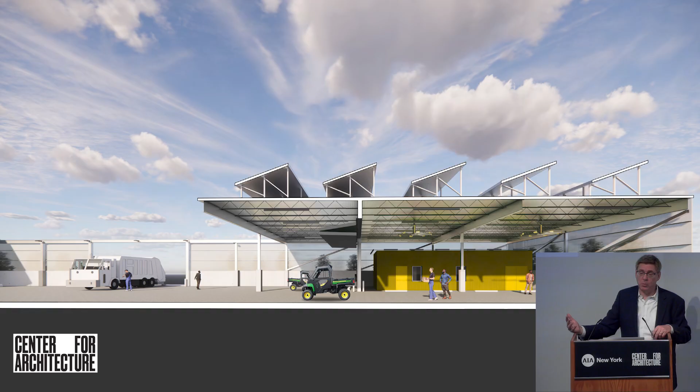This is the maintenance hub, which is basically central trash collection for all the buildings. This is a vital part of the project because none of the buildings can work independently of this maintenance hub. In addition to centralizing trash collection, it has composting, recycling, sorting, baling, all of these things, and it will serve as one of the local sources of employment.

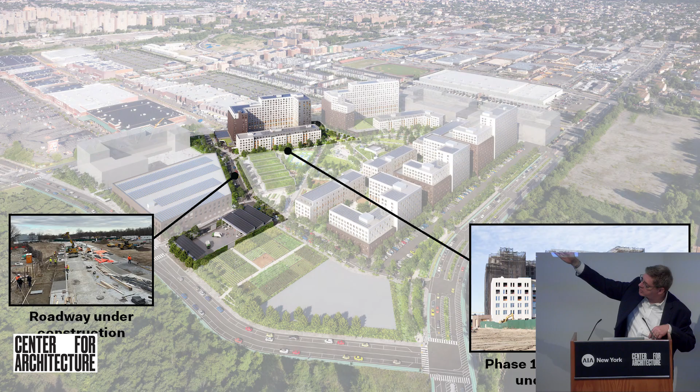This will be managed by Riseboro and staffed by local residents. And here's phase one. You can see Building C over there on Erskine Street, a piece of the new New York City public street, and then the maintenance hub there at the bottom of the image.

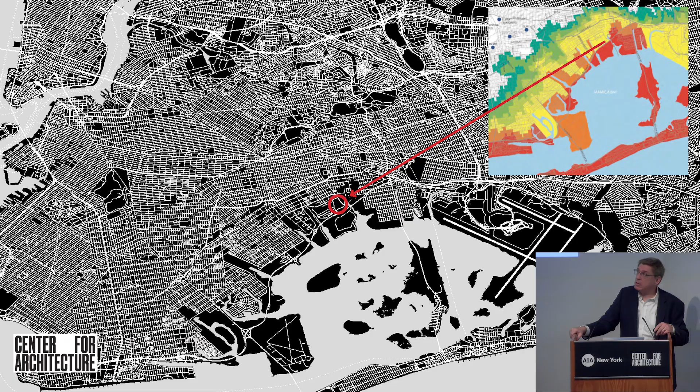In terms of flood risk, the site is somewhat protected from being in the worst flood zone by the natural man-made barrier of the Belt Parkway, as well as the natural tidal wetland zone that characterizes most of Jamaica Bay, which is a very important element in this area, as well as the construction of Shirley Chisholm State Park, a man-made landfill just across from the Belt Parkway. But still, it is very high risk of flooding.

The management of risk is really a key part of this project. And as I was listening to your description, Jen, of all these new guidelines and standards, it occurred to me that we just missed the first edition of the Climate Resilience Design Guidelines. But I'm proud to say that many of the conclusions we reached about mitigating storm risk are in fact part of the prescriptions of the guidelines. So I'm not sure if we conform absolutely, but retroactively we are very close to both the thinking and the logic, and hopefully the outcomes, of the guidelines.

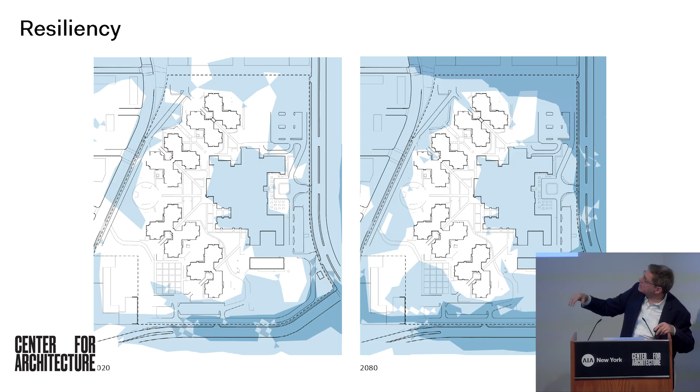And you can see what the risks are. So in 2020, maybe half of the site is at the 100-year floodplain level, but 60 years hence - it's a little hard to see the colors from where I'm standing - about two-thirds of the site are below the 100-year floodplain level, and the 500-year floodplain is now starting to lap at the edges of the site. So this was definitely a concern.

The CRDG - if we were doing this project today, this would be classified as a long-lived residential project, and the milestone benchmark you would use in terms of flooding, looking into the future, would be 2080. And the 2080 projections cover a range of flooding, because all of this is projections and all of it is uncertainty, somewhere between 2070 and the end of the century.

The major factor in risk evaluation is time. The further out you go in time, the greater amount of uncertainty, the greater the projected cost to mitigate the perceived risk, but also the higher the risks, and also the higher the level of protection. If you use a short-term framework, then your risks are better known, but they are lower in terms of the threat, lower in terms of the mitigation, but also lower in terms of protection. So that is the constant balancing act you have to deal with.

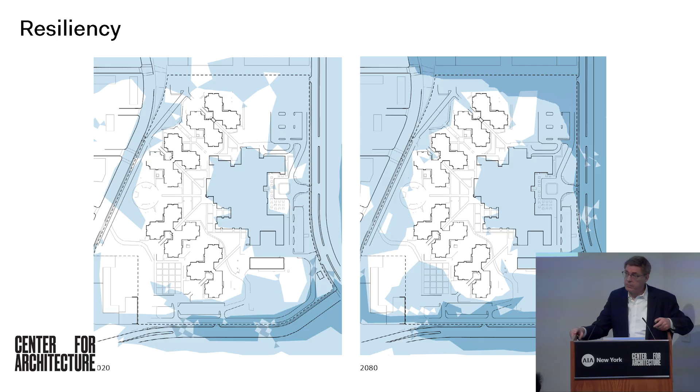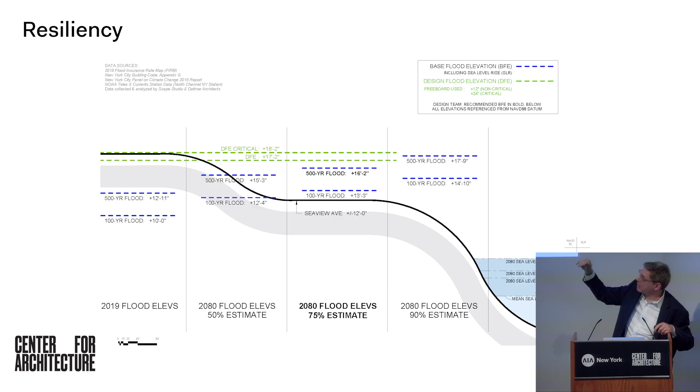But our approach to addressing this risk was not dissimilar to the recommendations of the CRDG. Basically, what we looked at was a series of probable flood estimates extending out in time, and you can see that the degree of uncertainty increases - that's the bottom line - as does the level of flooding. And very diagrammatically, this outline shows the height of the site, the height of the surrounding streets, and the sea level.

So we basically weren't unlimited in terms of what we could do with the elevation of the site. For obvious reasons, cost is a consideration, but also elevating the site means you still have to transition to the surrounding context, which of course is not changing in elevation. So where we situated buildings on the site, and how we made the transitions to the surrounding street, was a complicated and iterative process.

The strategy for dealing with flood on the New York City waterfront is one of adaptation, and it's multi-layered. Some of it is regulatory, some of it is insurance, some of it is built construction. Of the three classes of strategies it recommends - the first being flood proofing and hardening of a site, the second being raising the building, the third being raising the entire site - the third is the most onerous and expensive, and the rarest, because there's relatively little opportunity to do that. That's what we did here at Alafia.

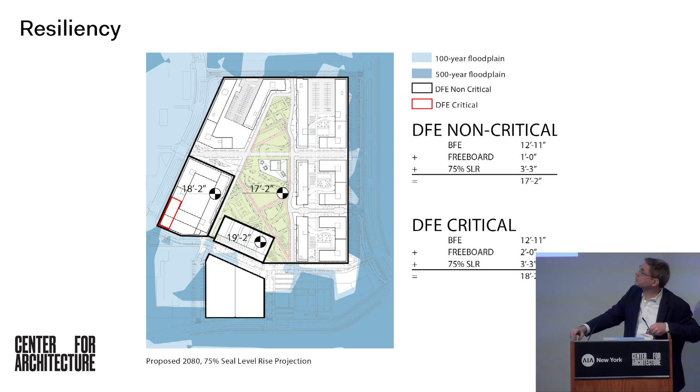In addition to flooding, we also have concerns about absorption and precipitation and factors that on their own can't present flooding risks, but could certainly aggravate storm surges and events like that. So what we try to do is overall maximize the amount of pervious areas on the overall site.

I'll show you in a minute a comparison between the existing condition and the current design condition, but also to adopt a series of stormwater management systems to deal with the impervious areas of the site.

Some of those are featured here. We have rain gardens, we have runnels that slow down the water and direct them towards absorptive areas. We have bioswales. Those are built along all of the major inner streets, including both the private streets we are developing and as part of this New York City DOT program, as part of their pilot street design.

Their street design includes things like the bioswales, but also pervious street pavements at the edge of the street, which are these precast pervious concrete panels that have drainage layers beneath them and are basically at the edge of the street right at the curb. Finally, we have a significant amount of on-site retention.

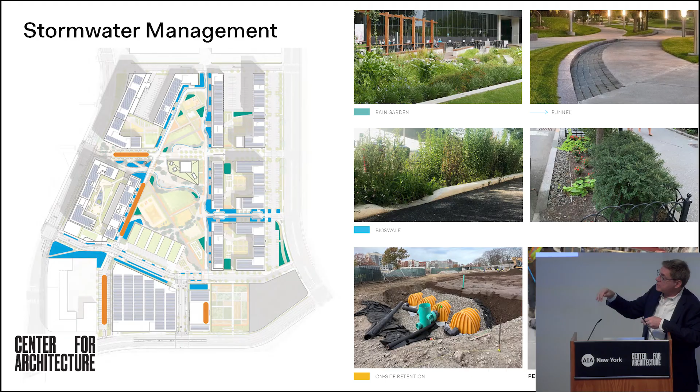So the idea, of course, is to retain water temporarily and then release it into the surrounding area. You can see these are widely distributed over the entire site.

And the result is this, and I think it's kind of a little eye-opening. So we have a modest increase in pervious area, which was our goal.

But you can see that the population density of the site has gone from this low-rise facility, which covered almost all of the site, had a large amount of internal roadways and parking lots. We've multiplied the population of the site by a factor of 10.

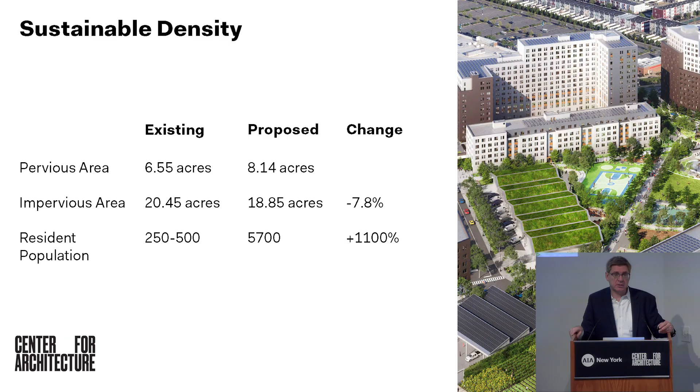And so in terms of absorption, in terms of flood risk, there is an enormous amount of progress, but also this incredible densification of the site. And here the hopeful message is that you can do both at the same time, and really this is the key, in our opinion, for coastal communities.

And with that, I conclude my presentation.

Okay, great presentations, thank you all. We're going to do some Q&A, but first I have a few questions myself, and we're going to start with Daniel, and then we can open up to Ilya and Jennifer.